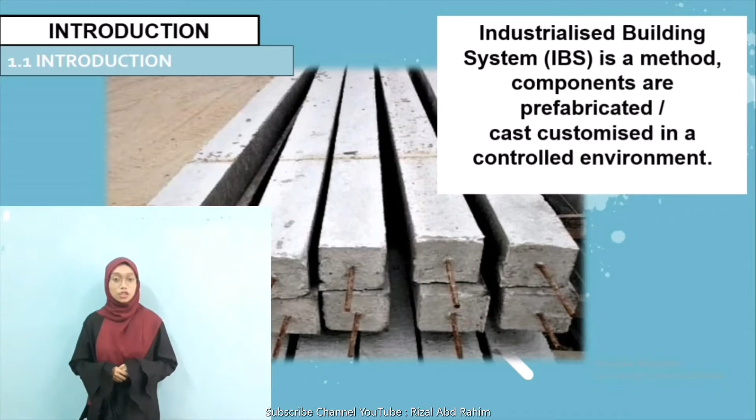Okay, now I'm gonna give a brief introduction about our product. What is IBS? IBS stands for Industrialized Building System. It is a method and consists of components that are fabricated, casted, and customized in a controlled environment. There are 6 categories in IBS, which are steel framing, timber framing, innovative system, reusable formwork, blockwork system, and precast concrete. For your information, this is a precast column. It's one of the structure precast column system in the main structure.

And then we continue with the problem statement. First of the problem statement is the lack of workers in the construction. Second, time taken during construction. This is evidence that shows why we create the product as a solution to solve this problem.

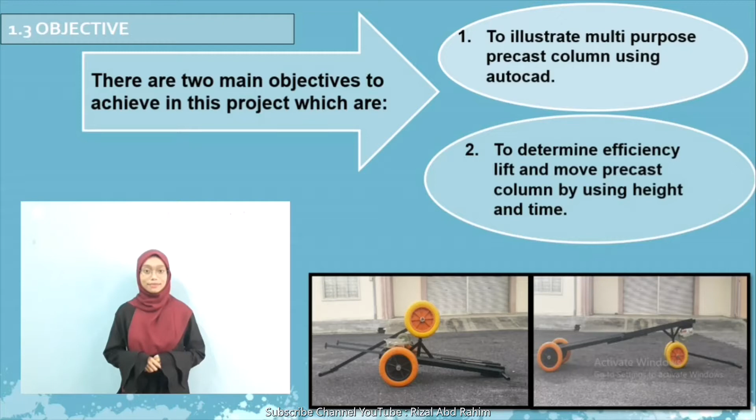Okay, now move to the objective of our project. The first one is to illustrate multi-purpose precast column trolley using AutoCAD. Second, to determine efficiency, lift and move precast column using height and time. Both pictures show the product that has been produced according to the design made from AutoCAD. And we use wheelbarrow tires for easy to lift and move precast column. With a tightened product frame and having a tire up front, it can ease the pressure of the load on individual while carrying the column precast.

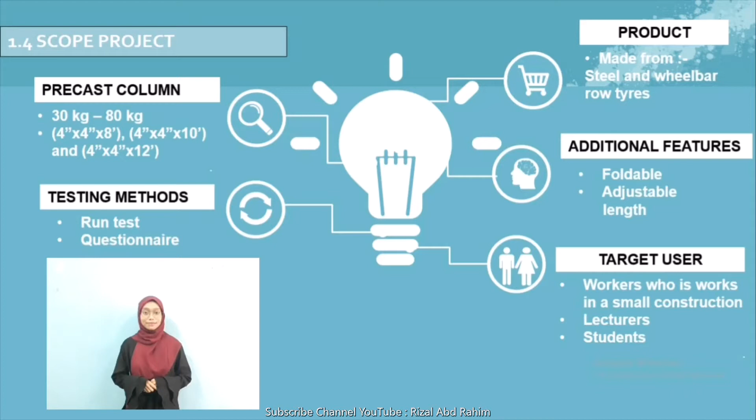Next, I will explain the significance of studying. The first one, to facilitate the work of lifting and moving precast column, such as small-scale construction. This is because it has wheels that help you to move the column far easier by reducing the amount of effort required. Next, this project does not waste time where employees do not have to scramble to lift and move precast column because it does not require a large number of workers. And now, you can easily move the column from one place to another place.

Furthermore, this product can help IBS to ease the work and also save time in construction process. Last but not least, the product can attract many contractors to venture into IBS and also reduce the manpower.

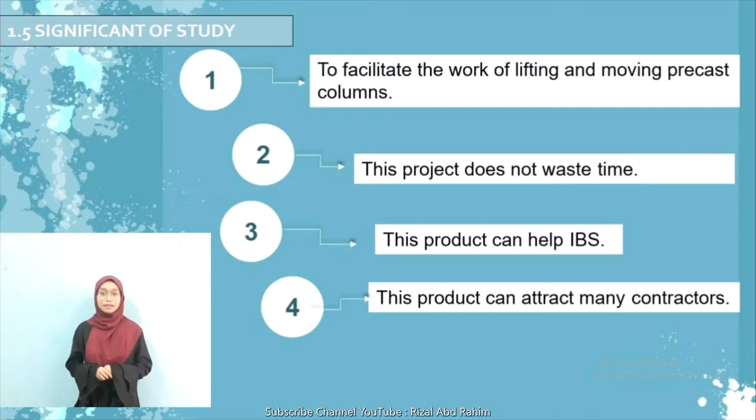I'm gonna continue the explanation for our project, which is Chapter 3, Methodology. In the chapter, the study will be focused entirely on the aspect or element of the material in relation to the methodologies used in success of this innovative project. Next, I will start explaining about flow chart, which is the step, the process, multi-purpose precast column trolley. First step is identify the problem statement and issue. Second, collect all the data needed for designing, lift and move precast column trolley from book, journal or patent. Third, propose a proposal, and if improvement is needed, we will repeat previous step again. But if no improvement is needed, pass to the next step to proceed.

After that, buy the material needed to make multi-purpose precast column trolley and send to the suitable factory to make the product, then testing the product. After testing the product, we will come out with the result. If the result fails, we will go back to the previous step, which is testing the product again. Once the result is success, the project will be reported.

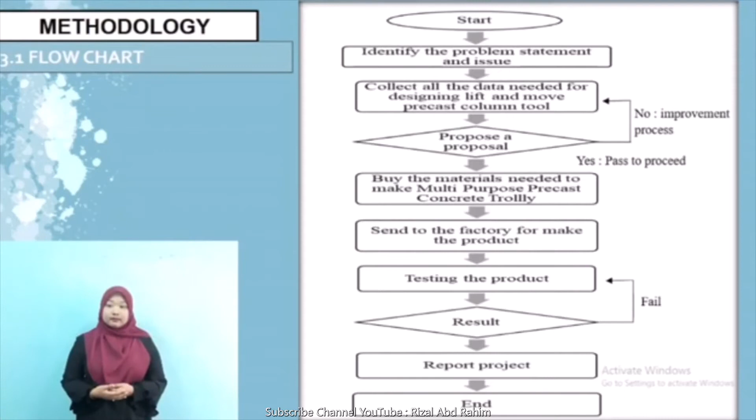Okay, now move to the final design of our project. Each design is a redesign to achieve better product effectiveness. I will explain about our design according to the view that has been sketched in AutoCAD. For front view, we can see there is a handle that can be adjusted up to 6 feet to control the movement of the tool while carrying the precast column according to the size. In addition, there is a brake winch at the bottom of the trolley body that serves to pull heavy loads like a precast column weighing 30 kg to 80 kg on the trolley.

Last but not least, the pulley is placed to support the movement and change of direction of the cable or belt, which stands for the transfer of force between the shaft and the cable or belt, so that the cable used does not break quickly when rubbing the rough surface.

Now, move to rear view. We use bearing to provide a low friction film between the rolling element and the races of contact with cages, guiding surface, retainers, and so on, and to protect the bearing components from corrosion.

In addition, in the middle of the frame, there is an additional handle on the right and left to make it easier to set up a precast column during construction. From the side view, we can see this product uses the concept of latch to lock the product from being stuck with carrying precast column. From the top view shows that the position of the materials used is clear.

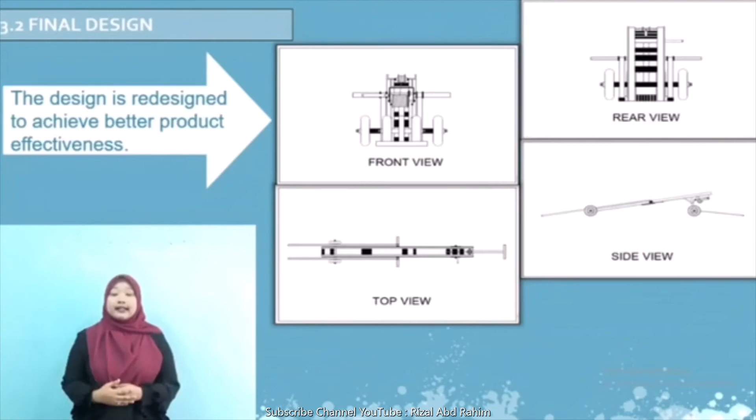We'll continue with steps to use the product, and you can take a look at the video that we have prepared. I will explain one by one. So the first step is open the fold of the product to make it straight. Second step is insert the solid rod inside the hollow steel to connect with the front tire.

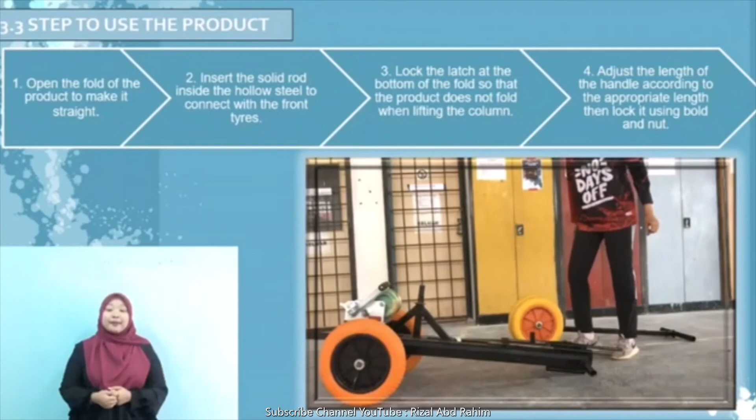Then lock the latch at the bottom of the fold so that the product does not fold when lifting the column. The last step is adjust the length of the handle according to the appropriate length, then lock it using bolt and nut. After completing all the steps, the product is ready to use to lift and move.

In this chapter is explained data analysis of several tests that have been conducted. The purpose of this testing is to make sure this product can support the column during the run test and also make it easier to handle the trolley. So we have done the run test by lifting and rotating the column, and it has been successfully done.

Okay, now continue the result of data in this questionnaire, so the respondents' highest period of experience is 1 until 3 years, which is 45%, and the lowest is 6 until 9 years of experience. This is to study the difficulty of an individual in bringing a precast column according to experience.

Manpower needed to lift and move a precast column 4 inch times 12 feet during the construction showed that 17 respondents were able to lift and set up a column of size 4 inch times 12 feet. Manually requires a lot of manpower. The highest number of employees is 5 to 6 people.